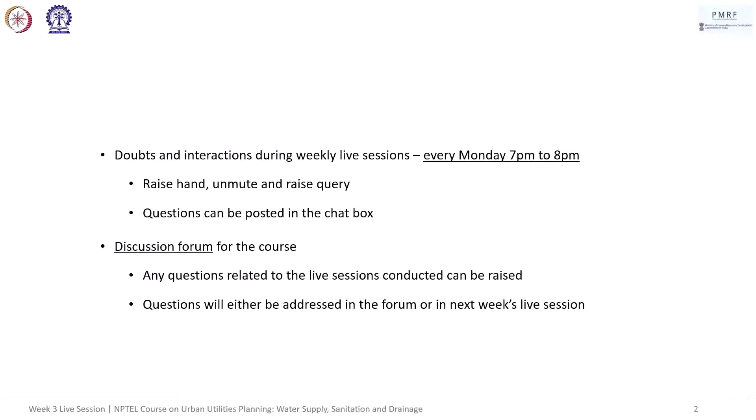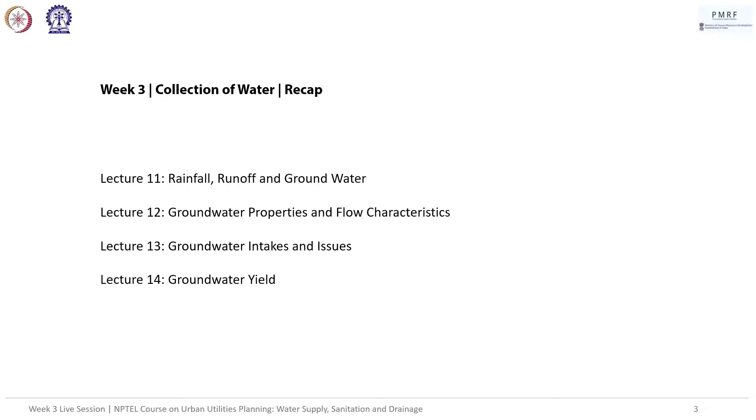So a small recap. Week 3 had 5 lectures, module 3. The first one was on rainfall, runoff, and groundwater. Then groundwater properties and flow characteristics were covered. Groundwater intakes and issues was covered in lecture 13. Lecture 14 included groundwater yield, where a couple of numericals were solved. And lecture 15 had surface water intakes.

So in the current live session, we'll mostly be looking at problems from the previous run of the course pertaining to week 3. However, if time permits, we can also look at a few questions from the week 0 assignment. The video for week 0 is actually available on my YouTube channel, but I don't think it was made mandatory. So those are very basic, introductory questions.

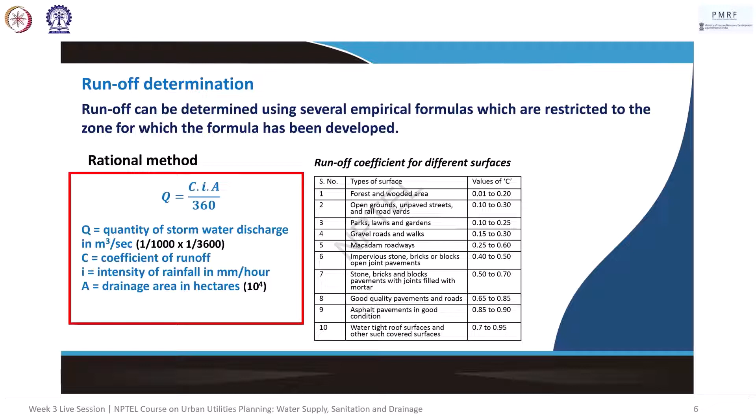Take something like a forest area or a surface with grass: these vegetation components slow down the flow of water, which means it's not just the permeability of the surface, but the velocity of the water that is lowered, so the time it spends on the surface is increased. Therefore, water seeps or infiltrates into the ground, which is why the runoff coefficient for forests or vegetated areas is very low compared to a concrete paved area, where water tends to run off. From personal experience also, wherever it is paved or where we have roads, the amount of water gushing through is quite high.

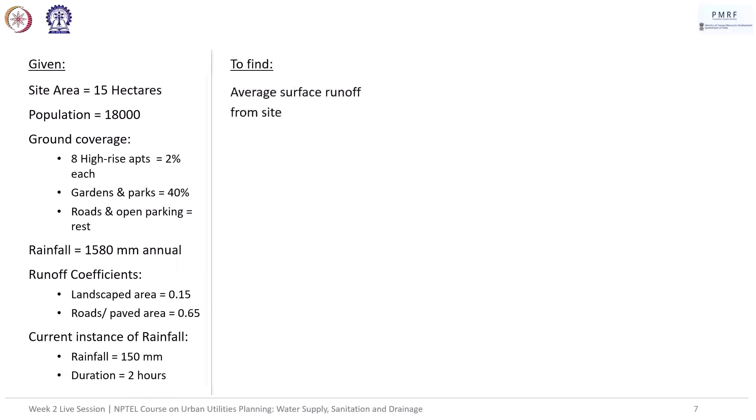So those are the runoff coefficients we've been given. Landscaped area we've been asked to take as 0.15, and roads or paved area as 0.65. For the current event of rainfall, we have 150mm in a period of 2 hours. So what are we supposed to find? The average surface runoff from the site.

For the calculation, we'll be using the rational method: Q equals C into I into A, divided by 360. Q is the quantity of stormwater discharge in meter cube per second. The units are very important here—whenever we use any formula, we need to input all our data in the appropriate units to get the correct answer, otherwise we could be off by quite a bit. C is the coefficient of runoff of whatever surface is being calculated for, I is the intensity of rainfall in millimeters per hour, and A is the drainage area in hectares.

First, we realize we have a site with a few buildings on it, along with vegetation and roads or paved area. So the first understanding in this kind of problem is about whatever is collected on the roof. For architects, civil engineers, or planners: we design drain pipes from the roof so that we can drain it off into the nearest stormwater drain, or in case of a combined sewerage stormwater drain network in the city, we make sure we let it into that combined network. So we don't expect runoff from this quantity of water.

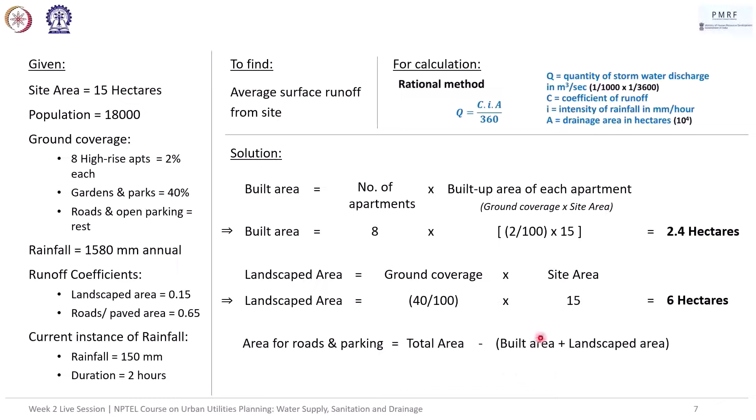Then we go on for the area for roads and parking. We've been told that it is the rest of the area. So we take the total area and subtract built area and landscaped area from it. So 15 minus 2.4 plus 6 gives us 6.6 hectares.

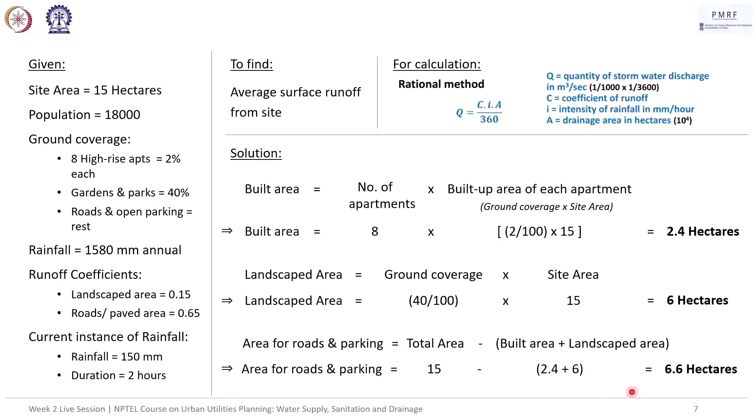So we'll primarily be calculating the surface runoff from landscaped area as well as areas for road and parking. Surface runoff from landscaped area, call it QL, is C into I into A divided by 360. C is the coefficient of runoff, and the question says that for landscaped areas the coefficient of runoff is 0.15.

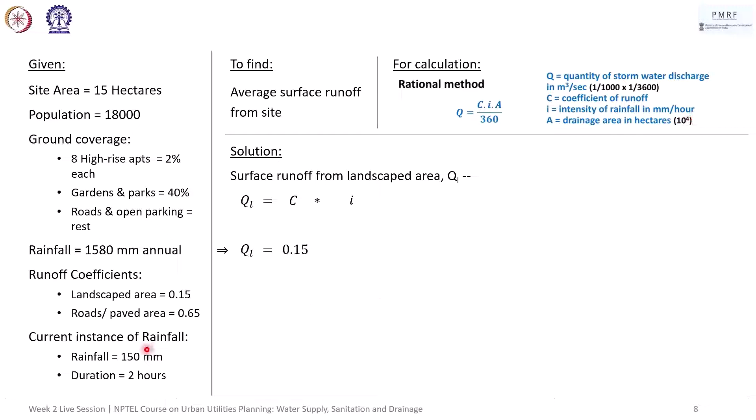Then we have I, the intensity of rainfall in millimeters per hour. From the data given, we calculate I as 150 divided by 2, which gives 75 mm per hour. And A, from the previous slide, came down to be 6 hectares, divided by 360. When you calculate this, you get a quantity of 0.19 meter cubes per second.

Similarly, we calculate the surface runoff from roads and the paved area, using the same equation. We're calling it QP for convenience - there's no hard and fast rule as to what you name these things. So C is 0.65 into 150 by 2. 0.65 is given here as the roads and paved area runoff coefficient, and 150 by 2 is again the intensity of rainfall calculated from the data given. The area is from the calculations we did earlier for the drainage area.

We divided by 360. Is there a question? You can unmute and ask. No, it was by mistake. All right, no problem.

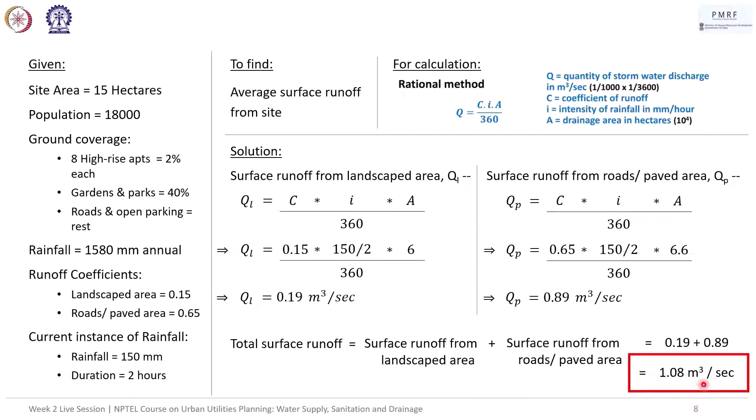So then we calculate QP to be 0.89. The total surface runoff from the site will constitute only the surface runoff from the landscaped area and the roads and paved area, which turns out to be 0.19 plus 0.89, giving an answer of 1.08 meter cube per second. So that is option A in the given question.

Any doubts on this problem? It's a very straightforward calculation.

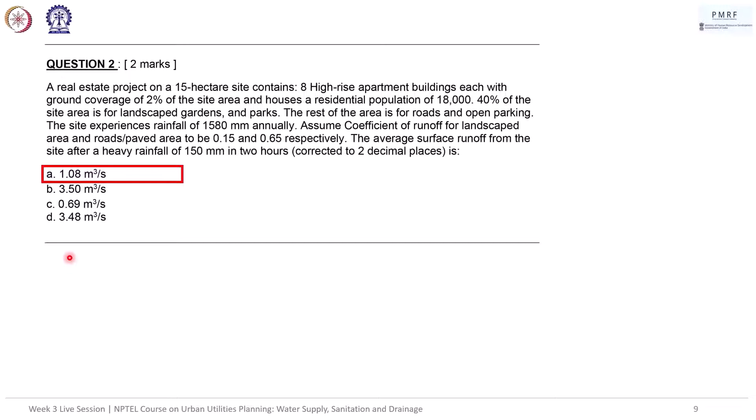So people might ask, what about areas where there is no drainage and a pipeline hasn't been given? So you add the building area also. However, it's standard practice in any building, even those that are non-designed, to have a pipe that connects to the nearest drain. However, in small residences, what might happen is they just drain it into the site. So when that happens, you add that area into it. This is for a very specific case.

Right, so let's move on to the next question. The major chemicals found in groundwater include calcium, magnesium, chloride, sulfate, or iron, magnesium, sulfate, lead, calcium, fluoride, arsenic, chloride, fluoride, or nitrate. Can anybody answer in the chat box?

Yes, I see a raised hand. You can unmute yourself. Shripad, right? Yes, A, madam, A. Okay, thanks. I think Tamanna also has texted in. You can post in the chat box if it is just the answer; if there is a query, please ask. Okay, so Inderjit says C. Alright, any other answers?

Okay, let's see from the slide that was there in our presentation. This slide talks about elements or chemicals found in groundwater. So 99% solute in groundwater comprises of 9 major chemicals: sodium, calcium, magnesium, potassium, bicarbonate, chloride, sulfate, nitrate, and silicon.

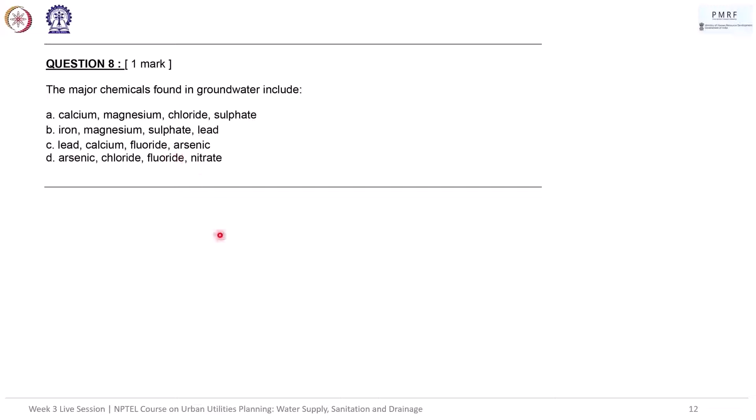So we have already one out, so this option is invalid. But also fluoride is also something that is present in relatively trace amounts. So then with option C, lead, arsenic and fluoride, three options are found in trace amounts. So that is also not our answer.

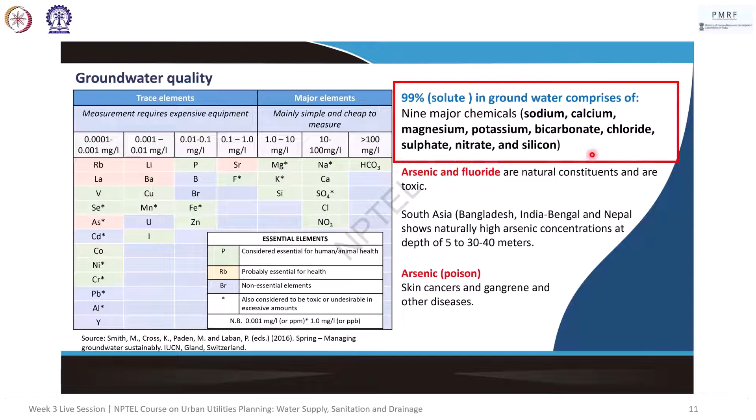B, iron - if I'm not wrong, iron is also a trace element. Lead is also a trace element. So that brings us to A, calcium, magnesium, chloride, and sulfate. If you look at the list that is given here, which is sort of worth remembering, to be honest. So A is our answer for the question.

Moving on to the next question. This is something that looks very complicated, but it's actually just about putting the right numbers in where you need to. So consider the following diagram and the observations made on a 30 centimeter diameter tube well.

The rate of pumping is 1500 liters per minute. Drawdown in test well 30 meters away is 1.5 meters. Drawdown in another test well 60 meters away is 0.6 meters. Depth of water in the well before pumping is 40 meters.

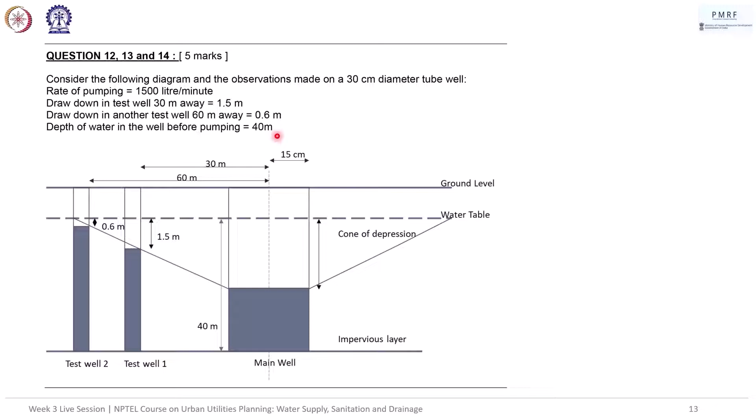There are three questions that are asked about this particular instance: the radius of the circle of influence, transmission constant of the aquifer, and maximum rate of discharge of the well, which is Qmax. If you actually went through the lecture, all of these terms should be self-explanatory. However, in the interest of this session, I'm going to quickly brush through what the questions are first. So what is this radius of the circle of influence?

This is a slide from the presentation that was there in the past week. So whenever we have a well, any kind of well from which we are taking out water, pumping out water, what happens is, because you are taking out this water, this line here is the usual water table - if you're not interfering in the flow of water, say this is the usual water table in that particular area.

But what we've done is we have dug a hole, made a tube well, and started taking out water. As a consequence of which, and empirically observed, as well as hypothesized by Darcy's law, what happens is there is a cone that forms. So this is not just a triangle in two dimensions - imagine this as 3D. What happens is there is a cone that is formed with this point as the center. This is the shape of the water table once you start extracting water from this particular well.

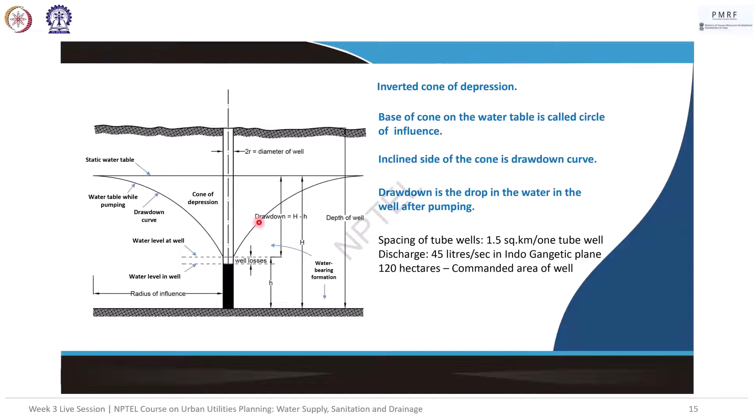So what happens is, any well or any intrusion here, you will not get water while this pump is active, while you are actively taking water or extracting water from this well. So there are multiple methods of calculating this cone of depression or the gradient that is caused. I think all of that was covered in the lecture. But a particular formula that we will be using here, given the kind of data that we have, is Thiem's formula.

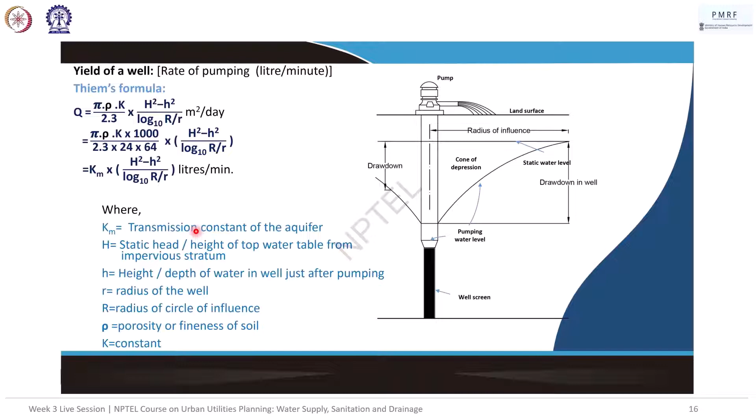So it's for calculating the yield of a well - this is the formula. Let's see what are the values that we have. This is the formula for Thiem's formula for calculating the yield. The first component is Km, transmission constant of the aquifer. So Km is merely just a constant here. What is happening is, when we derive this equation, we club up all the constants into Km.

So this is something that is part of the question - if I'm not wrong, question 13, I guess. So we will be calculating this value later. That's one of the questions that we'll be addressing.

So what is the next thing? H is the static head or height of top of water table from impervious stratum. So where is this data given? Depth of water in the well before pumping. So say we are not pumping out water, the water would have stayed at the water table, like the level of the water table, right?

So H is this level of the water table, or the height of it from the impervious stratum. So the nearest impervious layer is this. The distance between this water table, the height of this water table from this impervious layer, is what is H. As is given here, it's 40 meters - you can see this arrow pointing out to the extent of the H that we need. So we have H as 40 here in this problem.

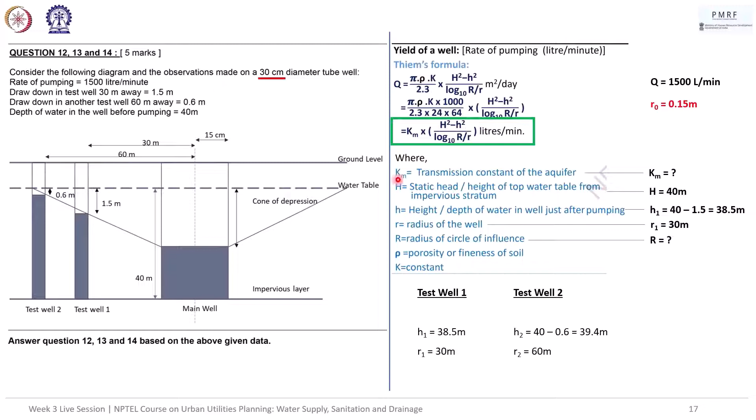One given value is the rate of pumping, Q, which is 1500 liters per minute, and the radius or diameter of the tube well is also given. The radius, R0, is 0.15 meters, which is half of the diameter. So that is the data that is available to us.

Question number 12: the radius of the circle of influence R in meters is 100, 110, 96 or 130. So this is the data given to us, and we are going to try to find R using Thiem's formula for calculation.

Let's use it for test well 1. Q equals km times H square minus h1 square, divided by log base 10 of R over r1. We don't know the value of km, so let's keep it as km here. Capital H square is 40 in our current problem, and h1 is for test well 1, so h1 square is 38.5 meters square.

If you look at the equation here, what is capital R? Capital R is our circle of influence, which we don't know — we're trying to figure this out. So we'll retain it as R divided by R1, and since we're talking about test well 1, we take the R1 value.

So then we also calculate — there are too many unknowns here to figure out. We have Q given as 1500, but we have two unknowns, Km and R, so we can't really figure out the value yet.

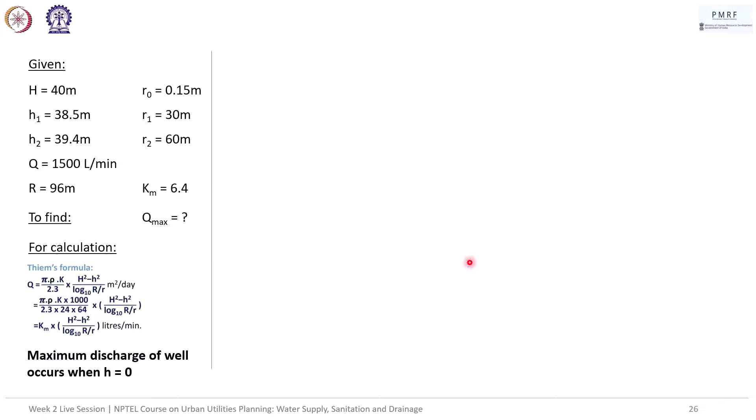So then again we use Thiem's formula for the main well, this time with h equal to 0. Finding Qmax, we have the Km value from the 13th question, which is 6.4. Then h squared will be 40 meters minus small h squared. In our case, we are taking it to be 0, so it will be 0 divided by log of R by r.

Here R will be the radius of circle of influence. But what will small r be? Basically, it will be the radius of the tube well that we are considering, so that will be 0.15. Thus we can calculate these values. You get this value, however the answers given to us are in meter cubes, so we divide it by 1000 and get 3.65 meter cubes per minute. So that's our answer. Any queries on this question?

Again, it might seem complicated at the onset, but if you just write down the given values, what is what, what is km given, what is capital H, small h, what is R1, R2, H1, H2, then your entire process becomes very easy. Are there any questions?

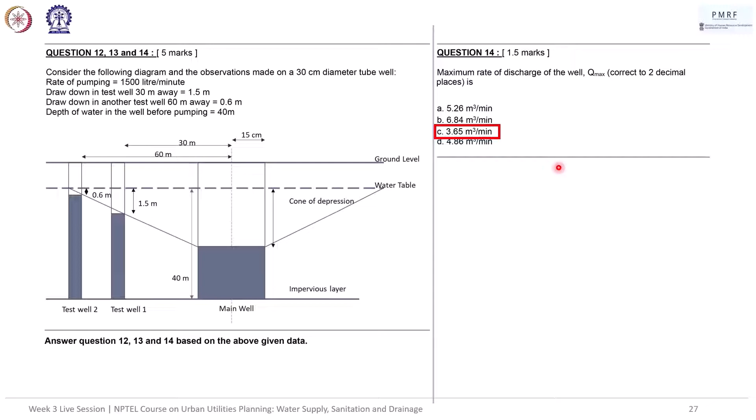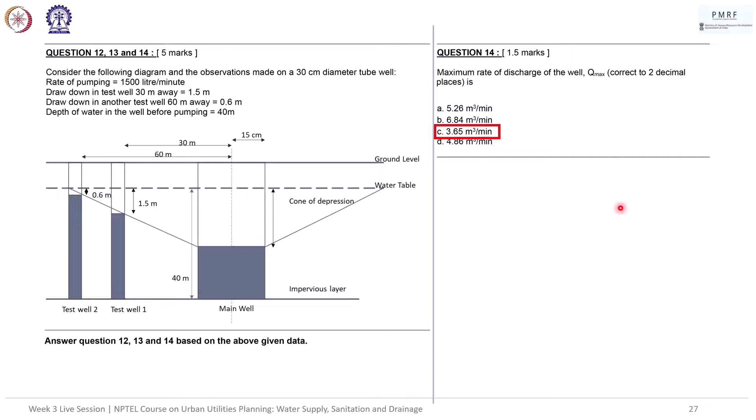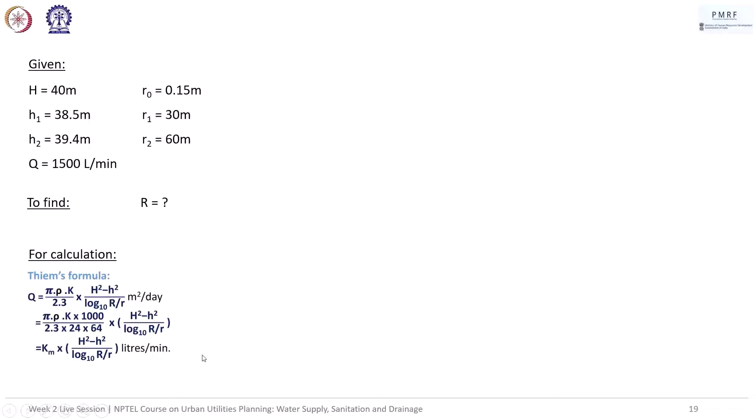Please repeat the last steps to find the value of R. Okay, I'm going to explain the R part now. I hope how we figured out all the values is clear. So these are our givens, right?

I hope this part is clear where we are figuring out. We are plugging in all the values for test well 1, so H1 and R1. H is for the water table level, and this is for R, the test well 2, so we'll have H2 and R2 values. So then we are equating this and this.

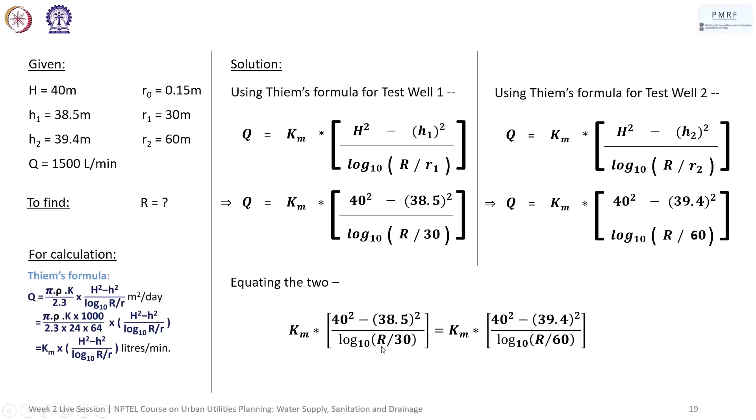I think an explanation is needed for this part. When you're equating this, km into this value is equal to km into this value. What we're doing is canceling out these two because they are the same value. So then what I'm doing is cross multiplying.

So I'm taking this here, sorry, I'm really new to this. Taking the log R by 30 here and 40 squared minus 39.4 here, you can see we'll essentially get log R by 30 divided by log R by 60 on this side, and 40 squared minus 38.5 squared divided by 40 squared minus 39.5 squared, 39.4 squared on that side. I've just exchanged the two sides, keeping all the unknowns on this side and the knowns on this side. It's merely for calculation purposes.

Then what we are doing is figuring out this value. It's turning out to be 2.47. Then log 10 of R by 30 divided by log 10 of R by 60. So whenever you have the log of a by b, pardon me, I'm using a mouse, it will be equal to log a minus log of b.

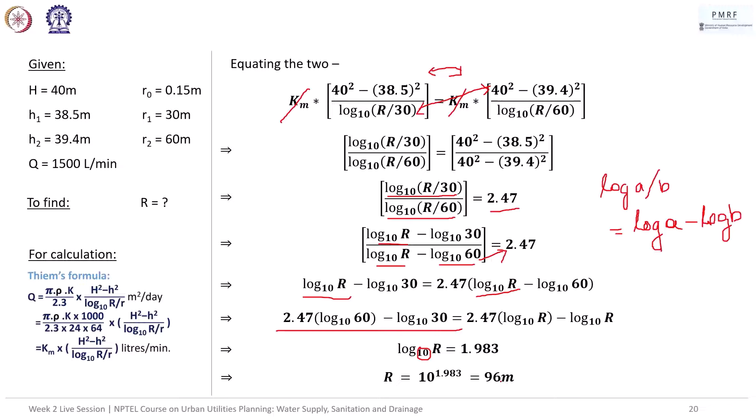Am I clear now? So it's more about the algebra here. It's just equating and then figuring out the value. I hope I was able to clear your doubt. Yes, all right.

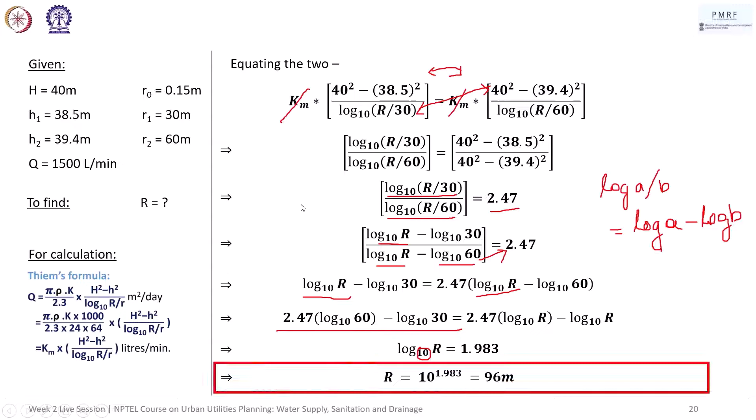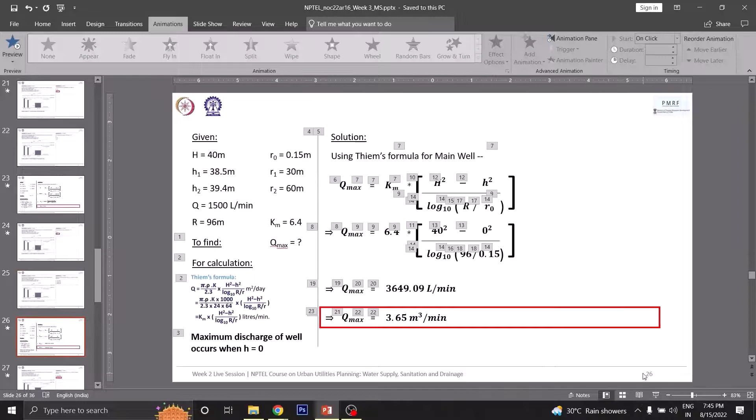That will be our slide. Any other questions on these three numericals?

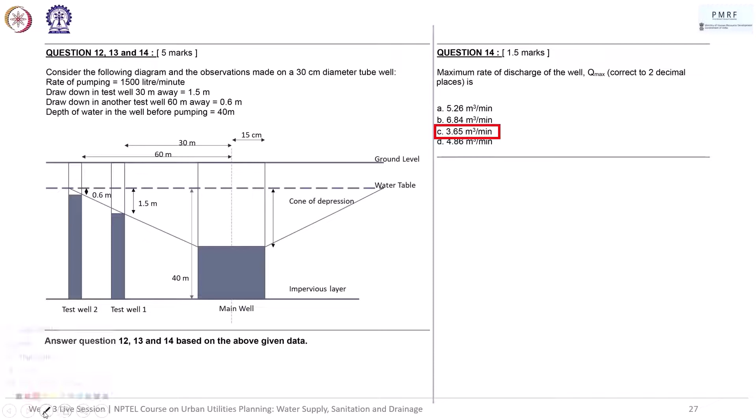All right, so we'll move on to the last question from the week 3 assignment of the previous run. Which among the following is not a primary source of water? A. River, B. Glacier melts, C. Canals, and D. Rainwater. So we have a slide in the presentation which talks about primary and secondary sources of water.

Primary sources, if you notice, are basically all natural sources of water which you get directly. You are not really putting it in a bottle, or putting it in a distribution system yet. So someone who's taking their water, say in a village, directly from a river and using that water, they are using a primary source of water.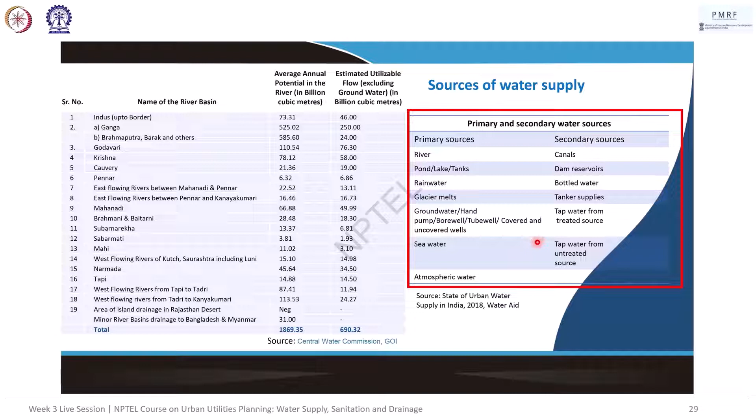Rather, when you are having - yes Rahul, canal is the answer - when a city is about to take water from somewhere and put it in a distribution network, that original source of water they rely on is a primary source. The secondary sources are all the artificial sources of water that we have. So you basically take water from a primary source, direct it through a secondary source, and then it reaches the consumer. So the answer is C, canals.

Okay, so let's look at a few basic theory questions. Are there any questions still now?

I hope things were clear.

With the numericals, there is one more numerical that's not covered in the graded assignments, but is explained well in the lecture. With almost all the numericals, it's just about knowing which value is what and which equation to use. It's as simple as that.

And how do we determine which equation to use? Usually, if you look at the question, you will know what the question demands.

Alright, so if there are no questions, let's just go through a few of these questions from the week 0 assignment of the last run. We had prepared these questions for a test run for these live sessions, but it was not really made live. So I'm just going to carry forward these questions.

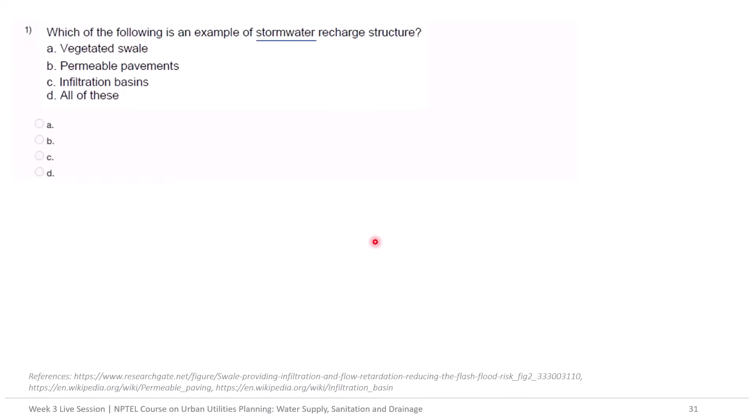They're very simple questions. Which of the following is an example of a stormwater recharge structure? Essentially, stormwater is any water from precipitation, which is not like sewage water or sullage water or anything - say from rain or snow, or a storm, which is where we get the word from. So we have four options.

A is vegetated swale. Vegetated swales are these - yes Shripad, that's the answer, D is the answer. Vegetated swales are these depression-like structures. They actually have a pipe running below them usually, where we allow for better penetration of water, infiltration and penetration of water into the ground.

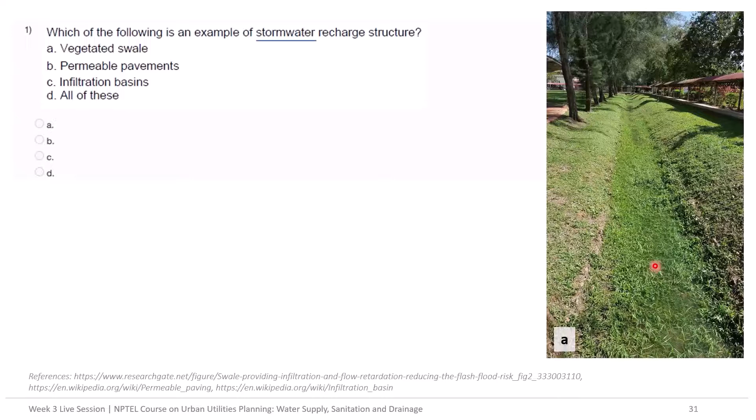So the answer will be all of these.

So runoff is the quantity of water which flows: A, in sewer pipes; B, due to leakage in pipes; C, over land to streams and rivers; and D, none of these. Can you try answering this, please?

One second. Yes, we have one answer. C, yes, C is the answer.

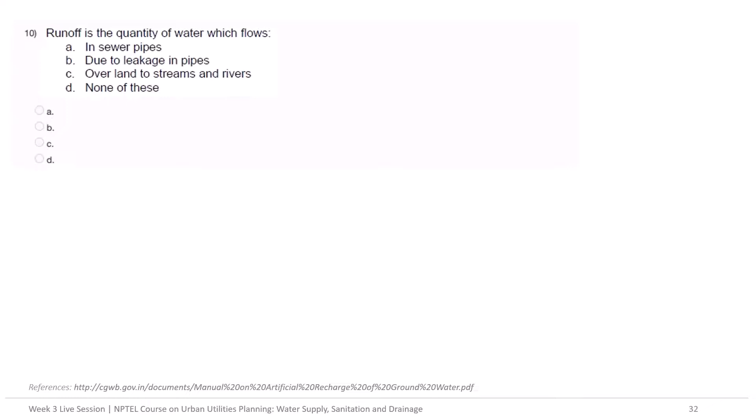Over land to streams and rivers. So essentially, runoff has three components. Don't mistake runoff for surface runoff. Runoff is defined as the portion of precipitation that makes its way towards rivers or oceans, as surface or subsurface flow. So both surface and subsurface flow are calculated as runoff, not just the part going on the surface. Earlier, when we were calculating with the problem, we were calculating something very specific - we were calculating surface runoff, not runoff in general.

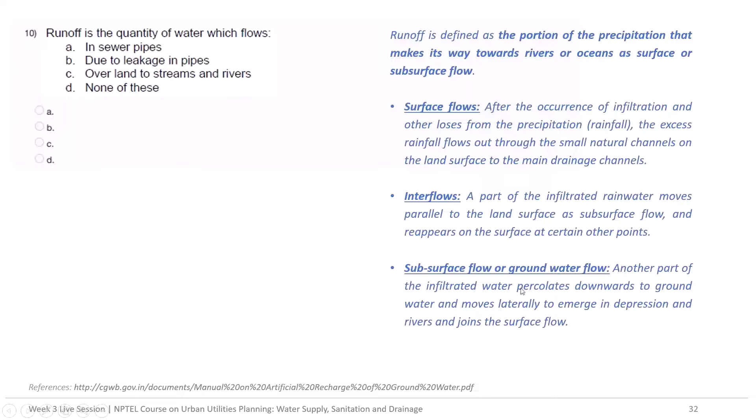So we can see the three components. One is surface flow, which we calculated earlier. Then interflow - a part of the infiltrated rainwater moves parallel to the land surface and reappears on the surface at certain other points. This is basically somewhere between subsurface flow and surface flow - it has gone below the ground and then, because of the land formation, ends up coming above the ground again. That's interflow, which is also included in runoff, and eventually it will go and mix in either rivers or oceans. And subsurface flow. So the answer is C.

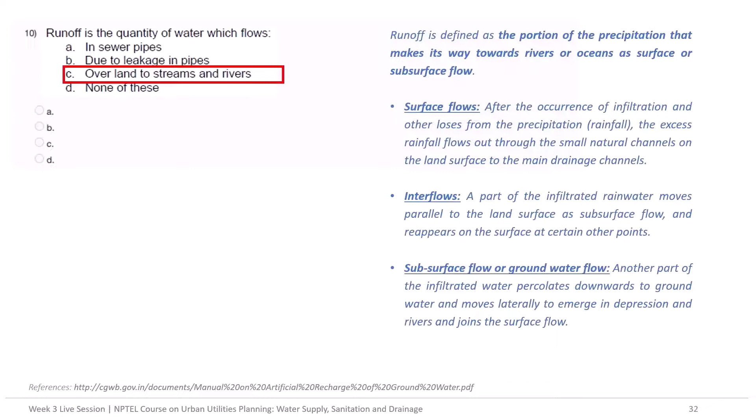Yes, all of you are correct. So the next question, just an extension of the same: which of the following notations for surface runoff is correct?

A: surface runoff is volume of rainfall minus evaporation losses minus percolation losses plus transpiration losses. Or B: surface runoff is volume of rainfall plus evaporation losses plus percolation losses plus transpiration losses. C: surface runoff is volume of rainfall minus the sum of evaporation losses, percolation losses, and transpiration losses. Or D: volume of rainfall plus evaporation losses plus percolation losses minus transpiration losses.

I think B and D are the same, right? No - evaporation losses, percolation losses, minus transpiration losses. So what would be the answer? You can type the answer in the chat box. Yes, the answer would be C.

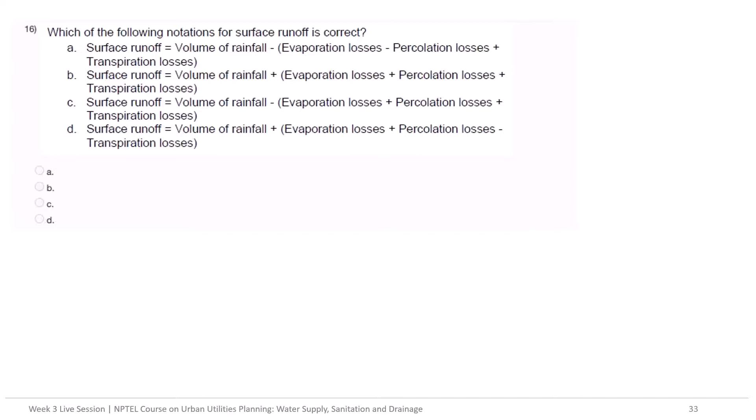So whenever rainfall is falling, there are only three - rather, four possibilities that can happen. One is evaporation, the water can evaporate back into the atmosphere. Percolation is when it infiltrates into the soil and then goes further. So there is a difference between infiltration and percolation: infiltration is when water goes into the soil, and percolation is when it moves further down into layers of soil or rock, into subsurface layers or aquifers.

So either evaporation can happen, or percolation can happen - water seeping into the ground - or transpiration can happen. Transpiration is when water absorbed in the soil is taken up by trees or vegetation, and then let off by the vegetation into the atmosphere again as moisture. We do not calculate any of these when talking about surface runoff. So essentially, the total volume of rainfall minus all the possible losses that can happen to water. And the fourth possibility is it runs off into the nearest river or ocean.

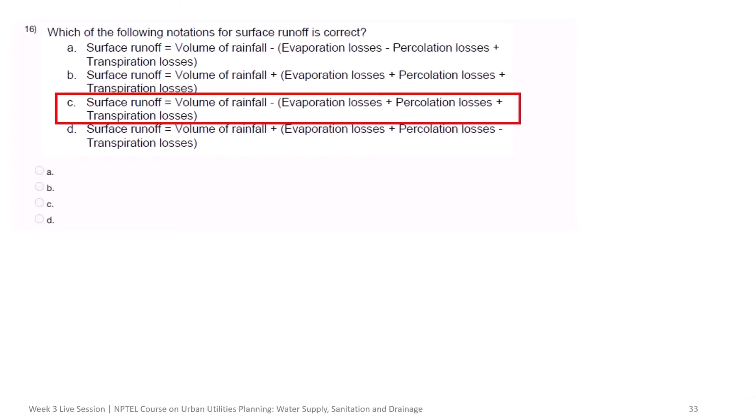The next question: what is an aquifer? It's a body of saturated rock or soil through which water can easily move, or it's an underground river or lake, or a geological formation found on the surface of the earth, or none of these. Any attempts to answer? A. Yes, yes, A is the answer - body of saturated rock or soil through which water can easily move.

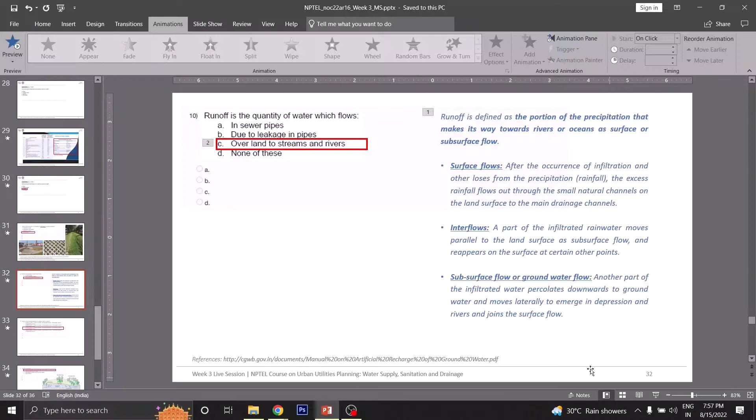I'm enrolled in both courses, transportation planning and utilities one. So whom should I contact or mail for having different dates of exam, or maybe a week's difference between both exams? Oh okay, so you're enrolled in both but the exam dates are clashing. Yeah, it's on the same date, I think 22nd October. If I'm not wrong, there are two slots you can opt for - a morning slot and an evening slot. But if you need the date shifted, I don't know if that's even possible.